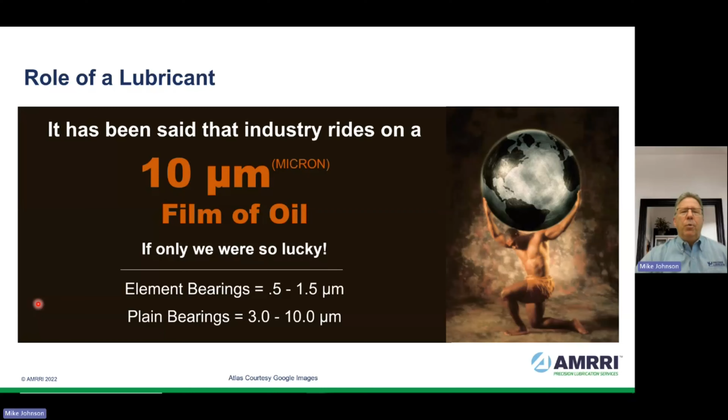The reality is most of our machines operate on an oil film that's the thickness of a red blood cell. Now, while it does work, it is still a precarious thin layer of protection. We build work plans to provide a continuous replenishment of this red blood cell thick layer of protection to our machine surfaces. Our attempt is to provide a continuous coating of new or healthy, clean, fresh oil that cushions and seals components to prevent wear and corrosion.

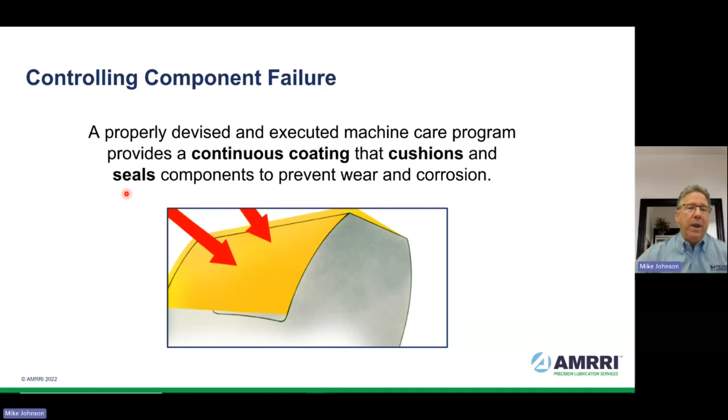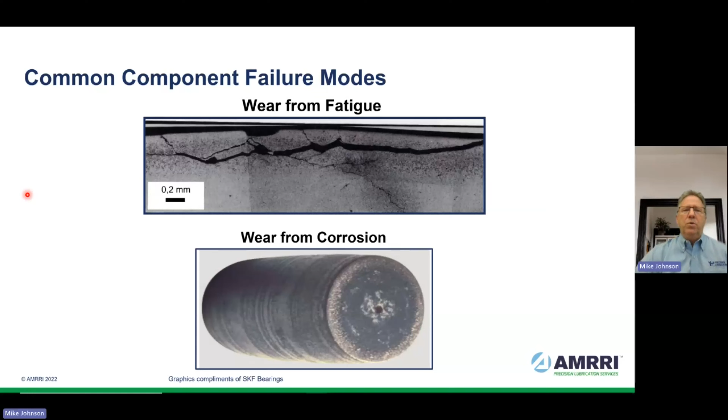When we aren't able to do that, we see wear from surface rubbing, wear from contamination, wear from fatigue and corrosion, all of which produces lost production time. And it doesn't really matter whether the repair time is scheduled or unscheduled. Once it's gone, we cannot get it back. Loss of machine repeatability may have the potential to impact product quality control.

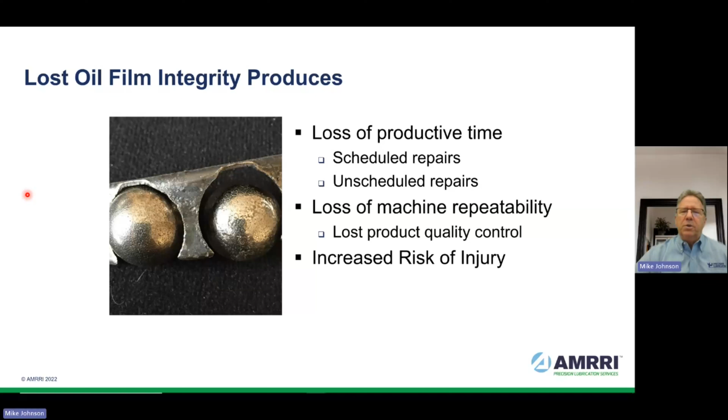Increased risk of injury. We do know from our own experiences that as personnel are busy scurrying around trying to make machine repairs in a rushed fashion, the risk of injury increases. All of this produces higher product cost per ton, per unit, for whatever our production increment is. And of course, that means loss of competitive position for our company, for our business unit.

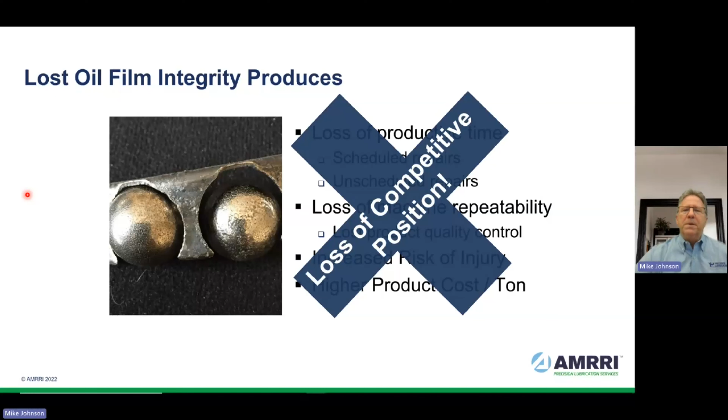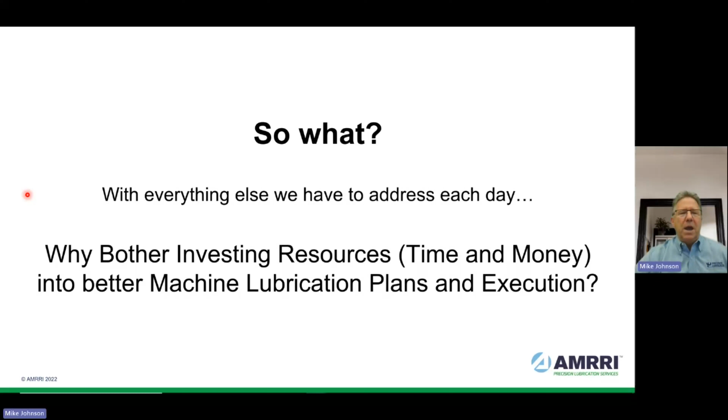These failure modes that we're talking about are all measurable, predictable, and avoidable failure modes. So with everything that we need to address on a day in, day out basis, why would we bother investing resources, including time and money, into better lubrication work plans and execution?

Reliability-centered lubrication holds the promise for us of substantial reductions in the needed replacement of lubricated machine parts. And we should target for a 25% reduction at a very minimum, with a target of 50% reduction in replacement of lubricated machine parts over a 3-year period from implementation of an aggressive reliability-centered plan. That also includes all the labor associated with those mechanical repairs, and certainly would include any contract labor associated with those mechanical repairs, including for planned and unplanned outage requirements.

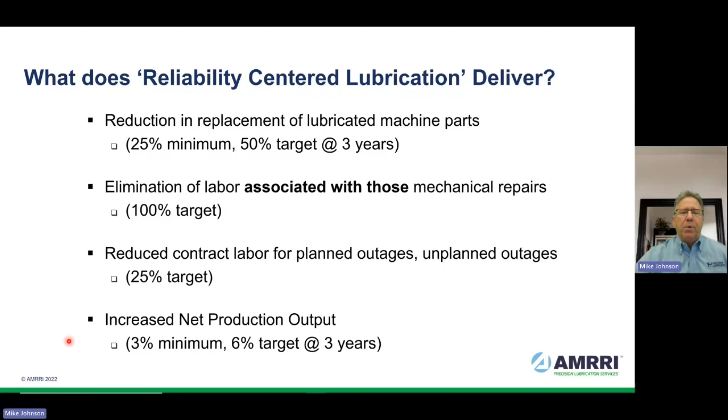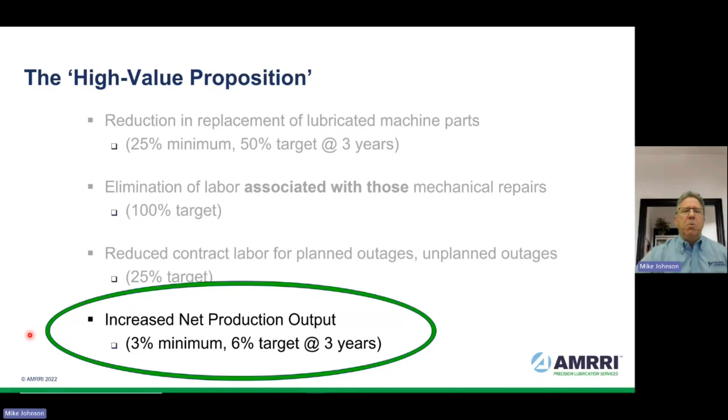Obviously, we're interested in increasing the net production output, and the real reward for our efforts would be the means to have more production, more output from the facility without spending more capital on brand new machinery. And if you look around at your production site and you look at the experience that you have on a day in, day out basis, you have to beg the question, is this what I want?

Is this acceptable? The system that you have now is perfectly designed to give you the results that you get right now. And upon answering that question, is this what I want? Is this as good as we can do? If you don't like the answer, if you don't like the results you get today, well, you need another system. You have to have a different system.

So there are steps that we can follow to create and deploy reliability-centered lubrication work plans that will help us reduce the helter-skelter busyness of our production environment by eliminating the need to replace lubricated machine parts. There are several steps. We'll follow those steps here as we go through this presentation, and we'll address each one of them one at a time.

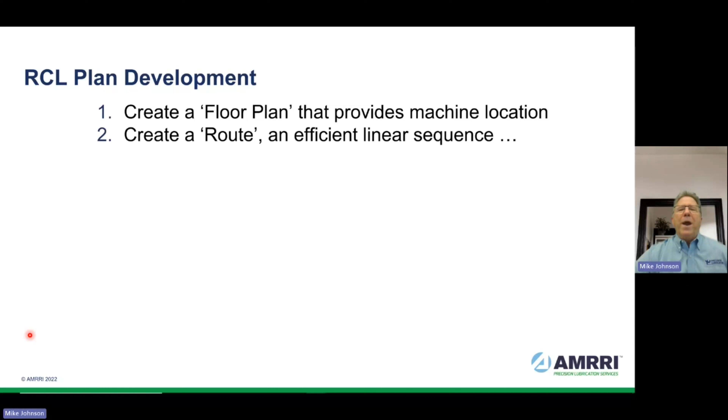Create a floor plan that provides the machine location for each operating asset. Create a route based upon that floor plan that gives us the means to offer our workmen an efficient linear sequence for completing the work practices. Record the machine information in that route sequence, including all of the relevant details: machine name, number, the component types, the component names and numbers and nameplate details that define what the component requires for long-term health, any environmental influences.

And then with that information, we create rules-based lubrication tasks. We organize those tasks in the efficient sequence that we have defined based upon that floor plan we created in step 1. We drop the tasks into a task management system. We're interested in managing, that is scheduling, tracking to completion, and reporting on every task that we have for every machine that we believe justifies long-term care.

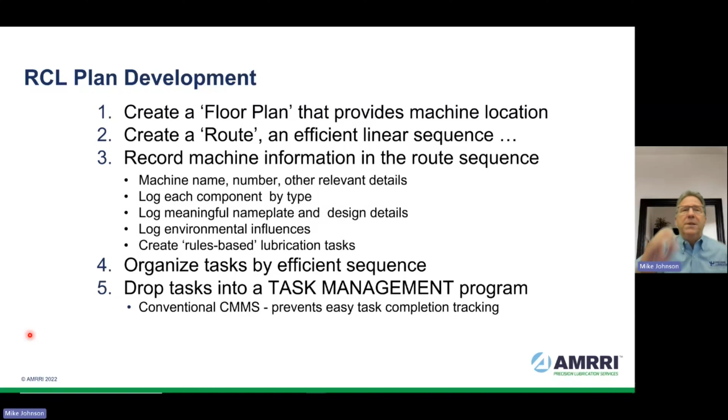Conventional CMMS programs are fantastic. They do amazing things, but they're not very good at keeping track of the tens to hundreds of thousands of tasks that we may need to track in a large production facility. We want to run weekly schedules so we can remain very close to task completion. And then we want to measure and report out our key performance indicators of the state of our program, again, on a weekly basis. So let's look at these things one at a time, starting with the floor plan.

When we engage with a customer to help them improve their work practices, we start by looking to create a floor plan. The floor plan represents the entire production unit, as big as it may be. That includes walls, tanks, stairwells, motor control rooms, and other non-rotating assets or features of the production facility, maybe a stairwell or elevator here and there. And then once we have the floor plan defined, we're going to go back into that area and plot the location of all of the machines that are in operation.

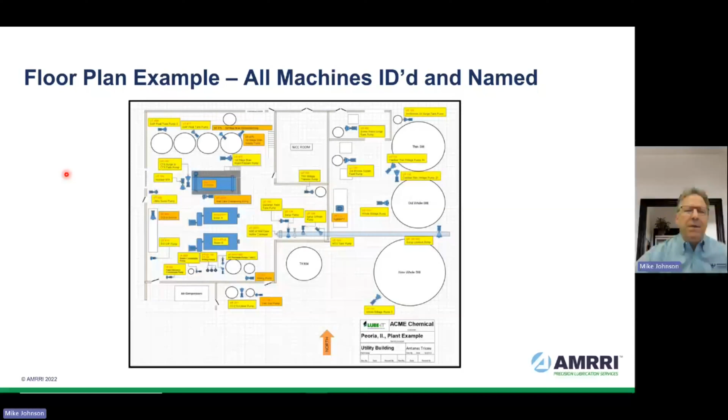Now, this is very important for a couple reasons. Number one, we need to make sure that we have the accurate name and number for every asset on the production floor. Number two, we need to make sure that we have accounted for all of the assets that are necessary to maintain production. And then number three, it gives us the means to look at the location of all assets relative to one another so that we can generate a route that represents the most efficient pathway for the workmen to follow to get to all of the assets in a timely manner on the production floor.

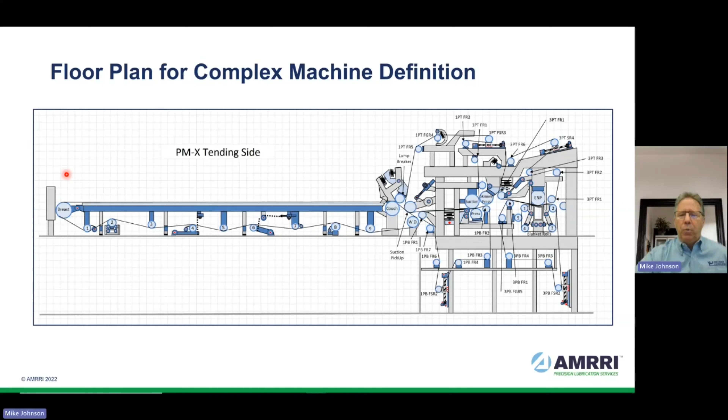We may have some very complex machines that are sprinkled around within their production department, and the same thing applies to very complex machines. This would be a machine with multiple drivetrains. We need to account for each and every drivetrain for the complex assembly, and then once again come up with a linear sequence that represents the means to cover all of those machine parts each time we issue a route related to those parts.

Number two, create the route. Now that we have a floor plan, we want to sit down with maintenance and operations and lubrication technicians and other personnel and plot out the linear sequence that represents the most efficient pathway from one end of the production site, the production department, to the other.

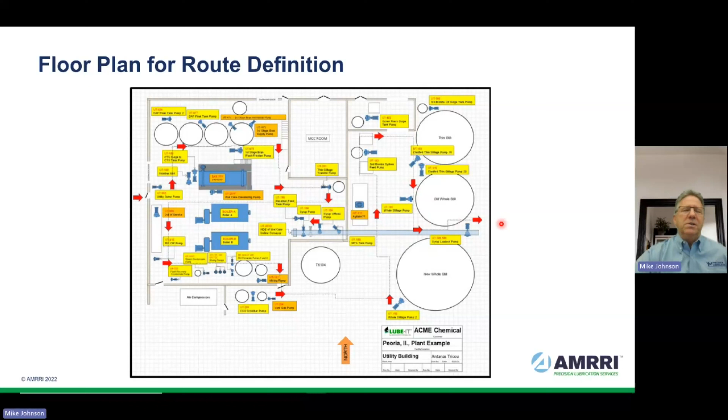We need to get the engagement of the persons that must deliver this work so that it is their route, not our route. If we don't get the engagement from the technicians, then there's going to be difficulty getting this work plan deployed effectively.

Number three, now that we have locations of machines in a linear sequence, we want to return to those machines in that linear sequence, in that route, and record all of the relevant machine information that's needed to build a work plan.

For our part, we use tools to help expedite and clarify this. This is a simple form that technicians will follow to fill out to gather all of the needed information, and then we can drop those details into a computer program to help organize our work such that we end up with very specific tasks for each and every component on each and every machine.

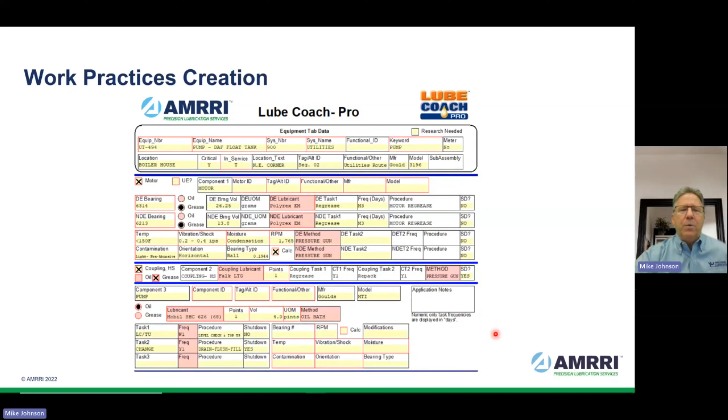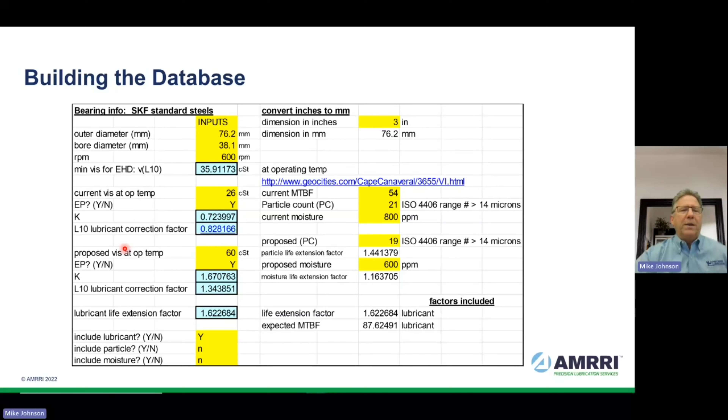That includes the product type that's defined and validated, the frequency for running work practices plans servicing the machines; the volumes and the frequencies should have an influence based upon the relative degree of difficulty of the operating environment. There's certainly calculations that need to be done in order to give us the means to validate the work practices, plans, and expectations. There's rules or guidelines for all of our machine operating components.

Considering an element bearing, there's rules related to validating the operating viscosity of the element bearing, whatever kind of element bearing it is. And it's a very straightforward calculation. So we can calculate the value, we multiply that drop dead limit by 3. We set that as a target for our product selection, and the alternative is, if we don't like calculators, we can always plot that on a chart provided by the lubricant manufacturers, the bearing manufacturer's guidance.

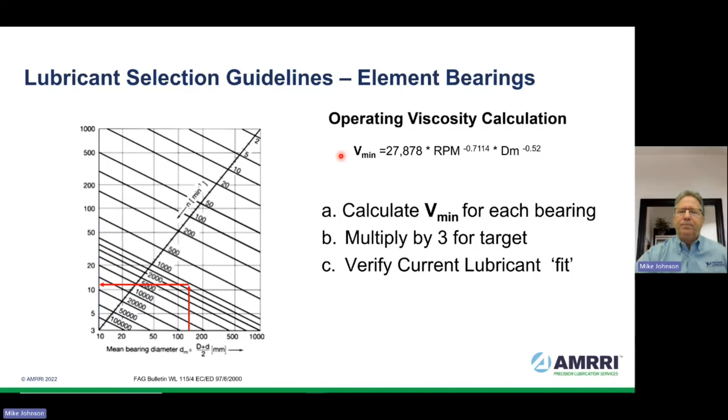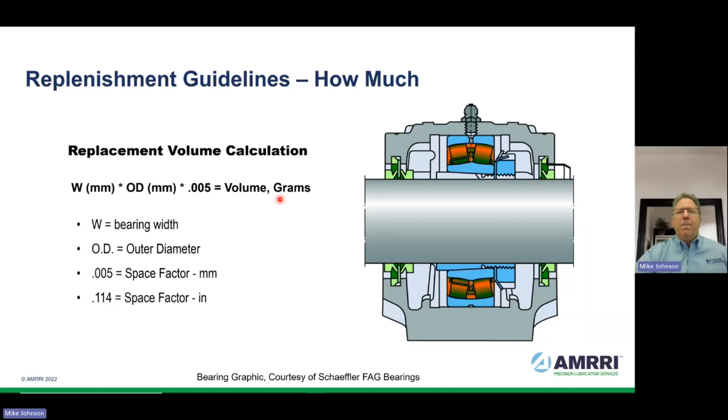There's rules around determining how much lubricant to provide. It's a simple rule. The width times the OD, measuring the bearing width and OD in millimeters, times 0.005 gives us a volume in grams for each replenishment activity. There's rules around determining how often we should be feeding those bearings.

And here's an example of a modified DIN formula, DIN standard 51825 part 2, where we have bearing information inside the first set of brackets, a value representing the environmental influences in the unit K that we see here. K is the multiplication of the service factor for bearing temperature, for the contaminant load, for the moisture load, for the vibration or shock loading parameter, for the shaft position, and for the bearing design value.

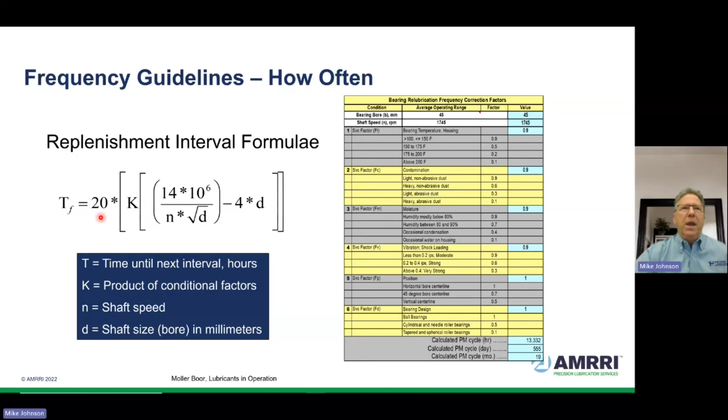Those 6 elements multiplied together give us K, multiplied by a plug factor 20 gives us an interval in hours that we can then turn into days, weeks, or months. The next thing we do once we have collected the information needed to prepare the tasking, we're going to organize those tasks in an efficient sequence.

So the output would look something like this. It's a simple chart that shows 5 machines, motor information, pump information, coupling information. Every lubricated component is identified. Some additional descriptions might be appropriate. The number of each, the unit measure for the lubricant that we're applying, and the number of locations where that lubricant is applied, the method of lubrication, the product type selection that's been validated through calculation, the component manufacturer,

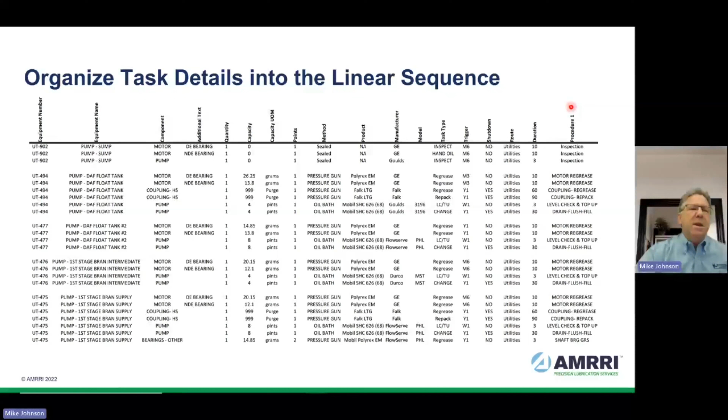make and model, perhaps, task type, the interval or trigger, whether the machine should be shut down or not to fulfill the work, the route and the sequence for that work to be completed, the duration for each task, and then lastly, a written procedure that helps the new workman understand what this task is and how it should be accomplished. So we organize all of our task care details into a linear sequence. The next thing we want to do is drop this set of details into a task tracking type of work management program.

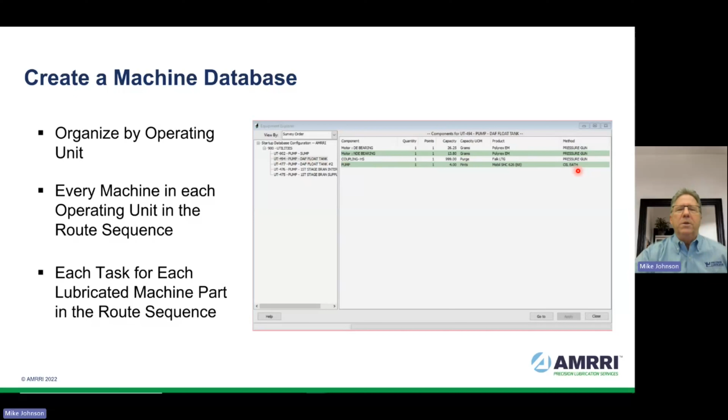There's plenty of task tracking programs available to select from. The benefit of the task tracking plan is that we can organize our work according to the production unit, utilities, then with each asset within the unit listed, and with each asset showing all of the parts that need to be lubricated and the details related to the work plan. Once we have the database built showing the department and the asset, the tasks that are to be scheduled will show up in a linear sequence.

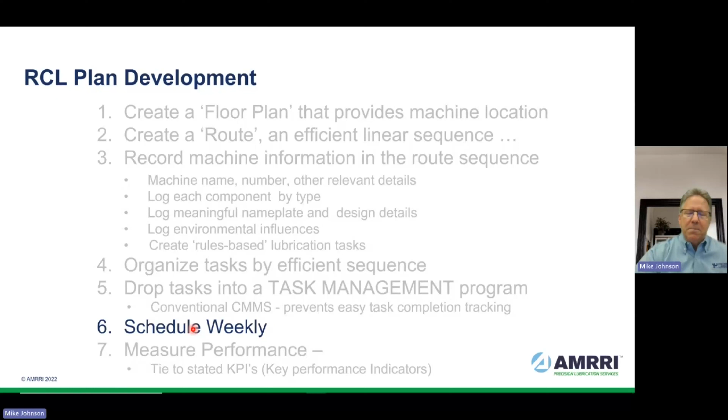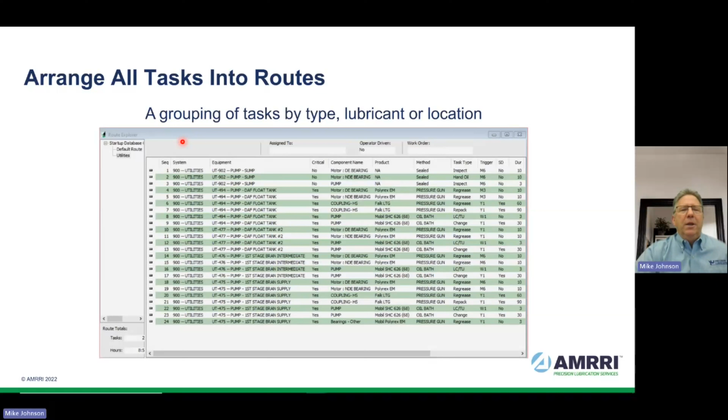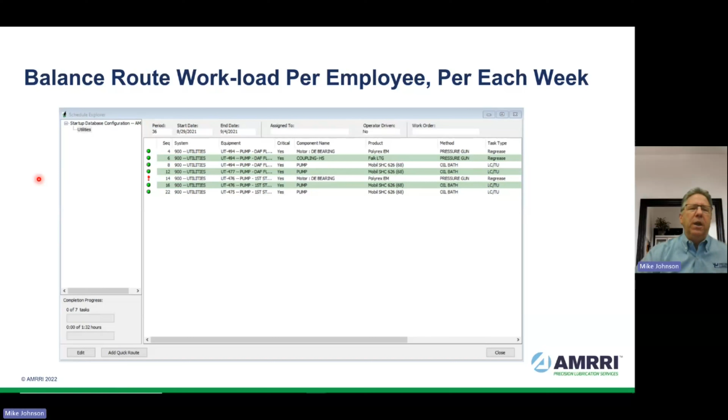From there, it's a matter of generating weekly schedules, giving that software program the means to push out the tasks that are going to be due during the weekly work period. And we notice from the previous step that we have 24 elements or tasks or components, if you will, in this very small utilities department. We're not going to see all 24 components each and every week. We're only going to see those that are either due, as denoted by the green ball, or overdue, as denoted by the red asterisk. The task tracking system will do a good job of keeping track of the completion status of the task, and if something is left undone in 1 week, it gets automatically pushed to the next.

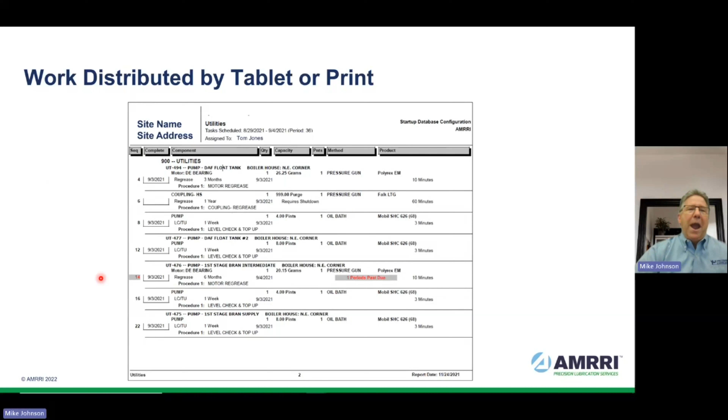We can print this information out to an electronic tablet, or we can print it to a sheet of paper, including the notation that tells the workman whether something is past due and perhaps how past due it might happen to be. The last step then, once we have deployed the work plan and we are collecting information back from the employees about the fulfillment of the tasks on a week in, week out basis, we want to measure and publish the success that we're having. Measure performance and tie that to stated key performance indicators.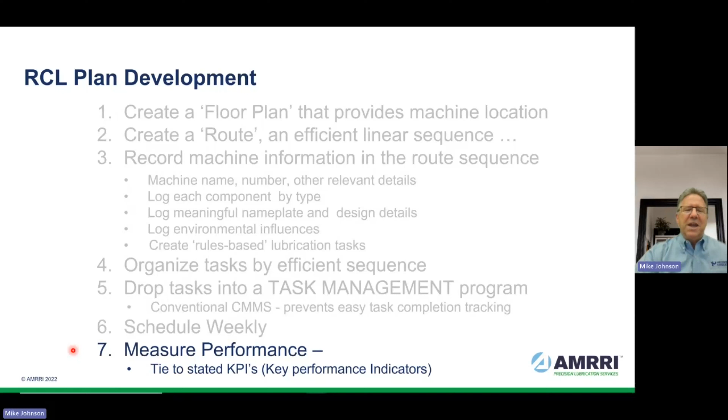Here's 3 reasonably healthy key performance indicators. The task completion percentage as dictated or as produced on a weekly basis. We would like to accomplish fulfillment of 90% of all of our weekly activities. And if a task is left incomplete for whatever reason, and there's often good reasons that we don't fulfill a lubrication task, well, let's record that reason and publish it such that we can figure out how to overcome that obstacle in the future.

KPI number 2, when doing oil analysis, the percent of acceptable lab results in any given weekly basis ought to be over 80%. This would be the result coming back from the lab without any kind of an alarm indicator for either oil health or the contaminant load or wear debris types of alarms and limits. KPI number 3, we should get in the habit of tracking the average ISO cleanliness measurement for all of the assets that are under oil-based condition monitoring. And we should set a fairly aggressive target.

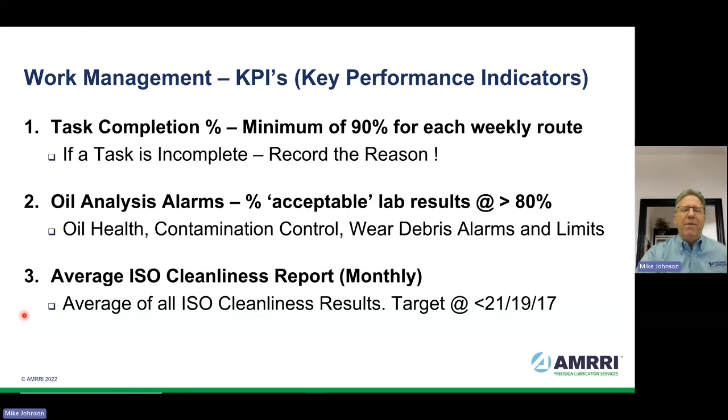Brand new oil out of the drum is going to show up at our back door in the neighborhood of a 21/19/17 ISO cleanliness value. This corresponds roughly to 10 parts per million or 10 milligrams per liter of gravimetric value. So it's reasonable to say we don't want the oil in the machine to be any dirtier than the oil that's delivered to the back stoop. And as our program matures, we ought to provide the means through assist filtration or improved onboard filtration to drive that oil to a cleaner and cleaner and cleaner state of existence.

All of these steps should follow rules. Determining component-specific lubrication requirements is a job that's based upon rules. There's rules for element and journal bearings predicated upon the math associated with the design of those components. There's rules for couplings. There's rules for gear drives. All lubricated machine part tasking and product validation should follow engineering principles.

We don't have time in this presentation to go through those well-defined engineering principles, but they're available in the public domain. The Precision Lubrication webpage could help you find them. The Machine Lubrication webpage can help you find them. STLE, the TLT magazine. There's lots of resources where you can go to learn about and follow those rules. And if you follow those rules, you will be successful in your efforts.